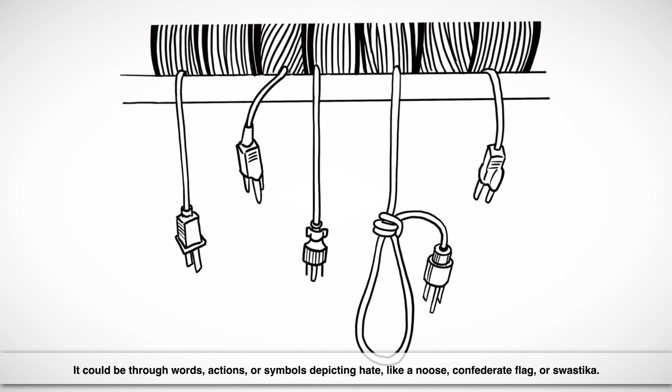In the event of an investigation, we will cooperate. Additionally, further action may be taken contractually. Bias and hate can come across in many ways. It could be through words, actions, or symbols depicting hate, like a noose, Confederate flag, or swastika. Other examples include the issuance of derogatory leaflets, threats, acts of violence, name-calling, offensive jokes, hand signs, improper stickers, unsanctioned non-work-related posters, etc. We expressly prohibit harassment or bias in any form or manner.

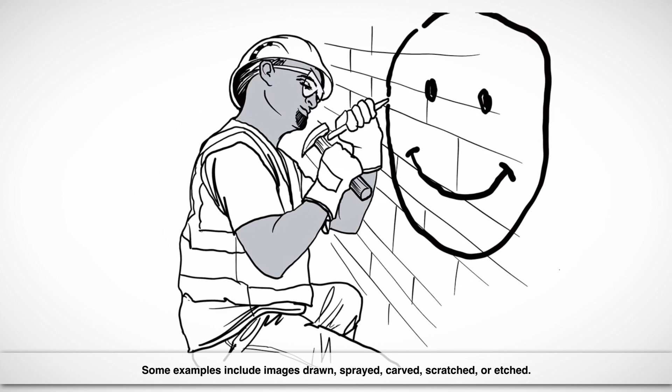All graffiti is defacement of property and vandalism. There will be swift action if an incident occurs. Some examples include images drawn, sprayed, carved, scratched, or etched. Remember, as we have stated before, in certain cases, bias-motivated events rise to the level of a hate crime or a criminal offense. In the event of an investigation, we will cooperate. Additionally, further action may be taken contractually.

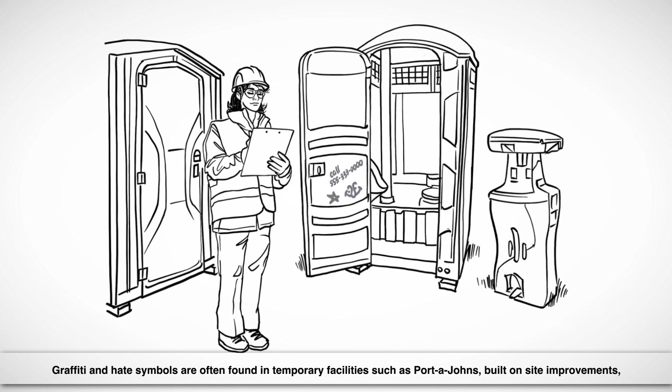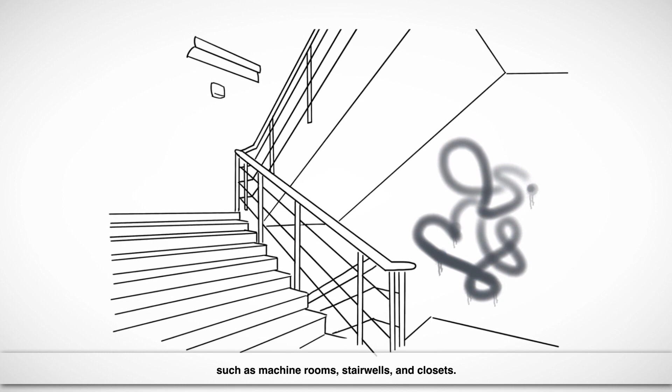Graffiti and hate symbols are often found in temporary facilities such as porta-johns, built on-site improvements, pedestrian-covered walkways, scaffolds, storage trailers, job trailers, site fences, etc. Graffiti and hate symbols are also often found in less frequently traveled locations such as machine rooms, stairwells, and closets. Other locations of graffiti and hate symbols include hard hats, toolboxes, and items on motor vehicles, such as bumper stickers, vanity plates, and license plate frames.

This is our work environment, and as a collective work group, we want to keep it clean, respectful, and inclusive. Remember, no graffiti of any kind is allowed on our job sites.

To help create and maintain an inclusive and respectful environment, we expect everyone to follow these principles on our job sites. Demonstrate a zero tolerance for bias and hate. Care for and support individuals and groups that are different than you.

Speak up if you witness graffiti or a bias-motivated event. Continue to educate yourself and encourage others to do so also. We will maintain transparency in reporting and cooperate with investigations and discussions.

If you are witnessing an event as it is occurring, please consider one of the 5 Ds of bystander intervention. Direct. Assess your safety first. Speak up about the harassment. Remain calm, yet be confident and assertive. Delegate. Locate another person to intervene.

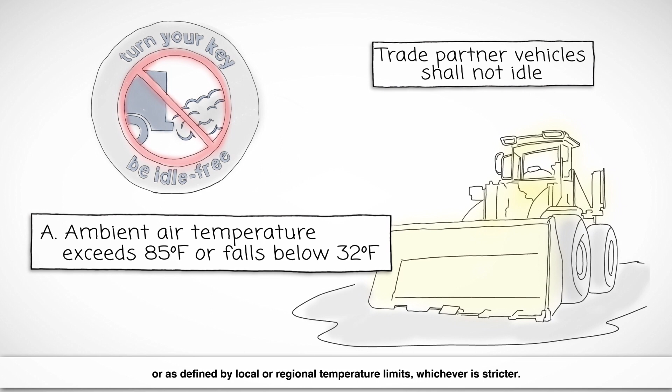The only allowable exceptions to the standard are as follows. A. Ambient air temperature exceeds 85 degrees Fahrenheit or falls below 32 degrees Fahrenheit, or as defined by local or regional temperature limits, whichever is stricter. B. Engine idling is required for the function of auxiliary equipment, i.e. cranes, concrete pumps, etc.

A fluent interpreter must be provided and on site for any crew that has one or more non-English speaking workers. Results of a drug test per the Drug-Free Workplace program are required to attend orientation. Additional testing may also be required if there is an incident, cause, or suspicion. If you test positive or refuse to test, you will not be allowed on site.

All construction offices and projects are tobacco-free. This includes e-cigs, vaping, and all forms of tobacco. A tobacco zone may be established outside the project. If you are issued a badge, keep it on your person at all times when on site.

All workers are expected to participate in the morning safety huddle and stretch and flex to develop a safe plan of work for the shift. Throughout the work shift, if any new tasks or changes come up that weren't planned at the beginning of the shift, work must pause and the plan must be revised. All personnel are empowered and encouraged to stop unsafe acts and identify, correct, and report any unsafe conditions.

Headphones, earpods, or radios of any kind are prohibited, as use of these devices can impair your ability to hear emergency signals or warnings. Do not walk or drive while talking on the phone or walkie-talkie.

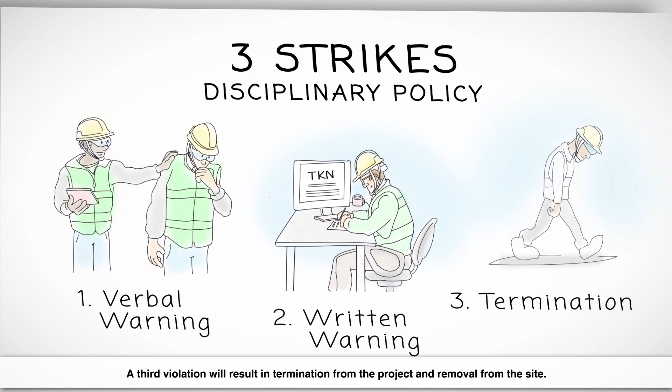There is a 3 strikes disciplinary policy regarding safety violations. The first is a verbal warning. The second is a written warning with mandatory retraining and reorientation. A third violation will result in termination from the project and removal from the site. Our overall goal is to provide safety coaching and retraining when appropriate.

We reserve the right to have removed any employee of any company for serious, repeat, willful, or egregious violations, skipping the 3-strike process listed above. Outside third-party training relative to the safety infraction for any employee to be able to return to the site may also be required. Supervisors and crew leads may also be held accountable for the actions of their employees.

Any injury, illness, or near misses should be reported immediately to your foreman, supervisor, or crew lead, who will notify the site management team after stabilizing any injuries or unsafe conditions. All incidents are investigated for the purpose of identifying the cause and preventing future incidents.

No incident, injury, or any level of harm is ever acceptable. Accidents are usually the result of poor or no planning. Participating in safety huddles, committees, and other safety-related events is something we should all do willingly. By identifying the potential risk your team could encounter and helping to plan the work and working the plan, you are helping to create a safe work environment for yourself and everyone around you.

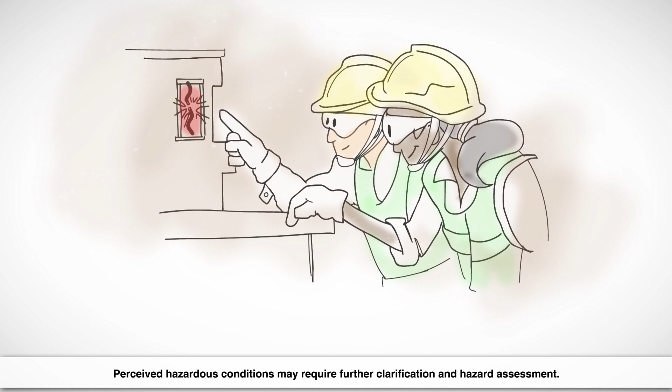Everyone is encouraged to ask questions and report actual and perceived hazardous conditions to site supervision. Perceived hazardous conditions may require further clarification and hazard assessment. If you have any questions or concerns, please ask site supervision for assistance.

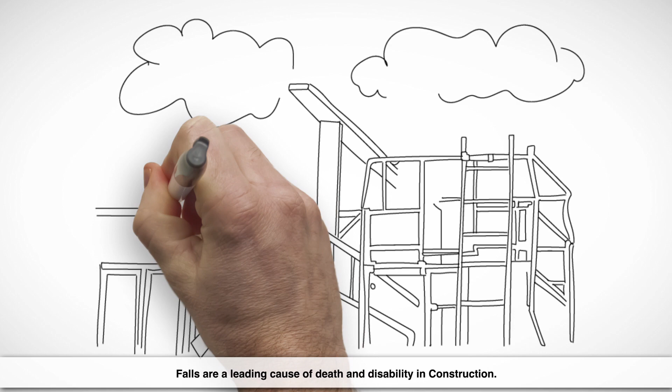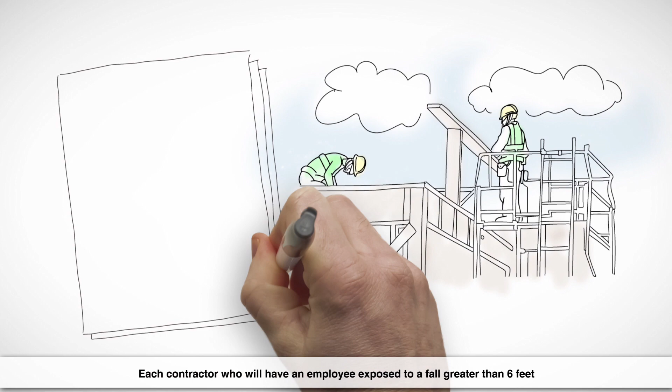Falls are a leading cause of death and disability in construction. Pre-planning is required to identify any risks and provide proper fall prevention for anyone working 6 feet or higher. Each contractor who will have an employee exposed to a fall greater than 6 feet must submit a written fall prevention plan prior to beginning work.

Each employee must be trained in the use of fall prevention equipment and participate in the safety pre-planning process. All conditions that will require personal fall protection shall be discussed and documented in the daily pre-task plan and reviewed in the field by the crew leader.

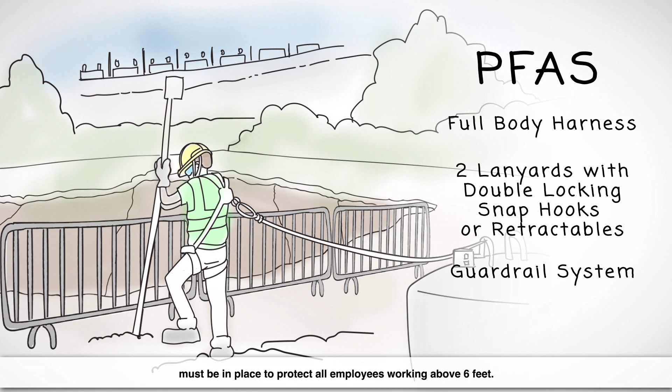A personal fall arrest system, PFAS, comprised of a full body harness, 2 lanyards with double locking snap hooks or retractables, or a guardrail system must be in place to protect all employees working above 6 feet. Safety monitors are never allowed as a means of fall prevention.

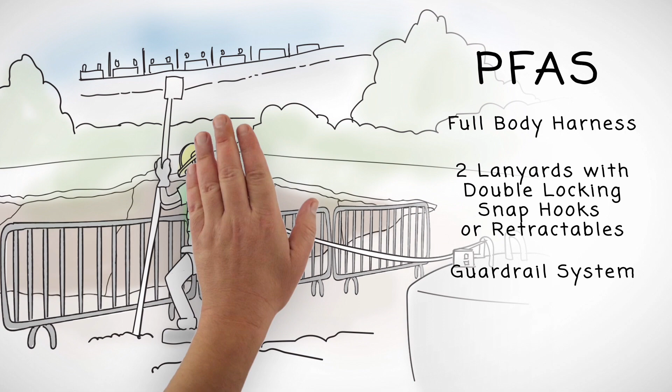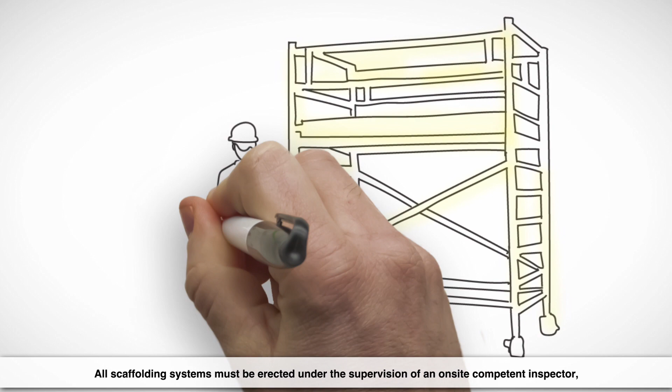All scaffolding systems must be erected under the supervision of an on-site competent inspector using 100% fall prevention during erection and dismantling. Scaffolding must be inspected daily prior to use by an inspector who will tag and date the scaffolding as compliant and safe, or red tag it as non-compliant or out of service.

Never use a scaffold that is out of service. Do not use cross-bracing as a ladder. Cross-bracing cannot be used as an alternative to top or mid-rails.

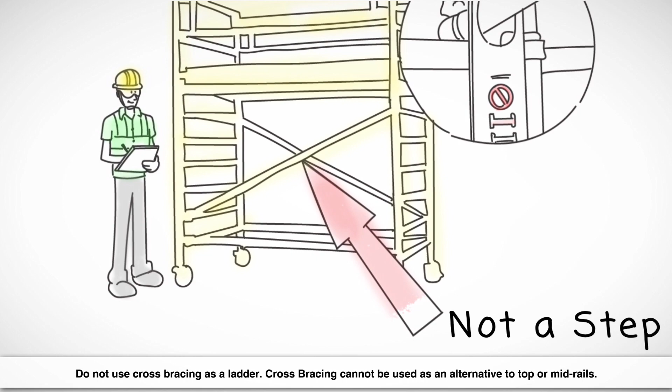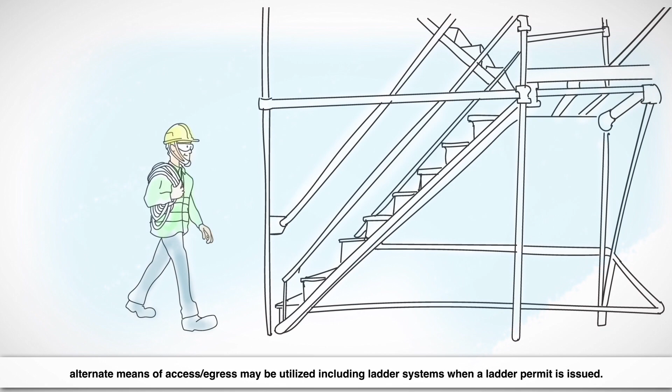Frame and system-type scaffolds, including but not limited to masonry and tube and coupler, must be accessed via scaffold stair attachments. Where space does not permit the use of a stair, alternate means of access/egress may be utilized, including ladder systems when a ladder permit is issued.

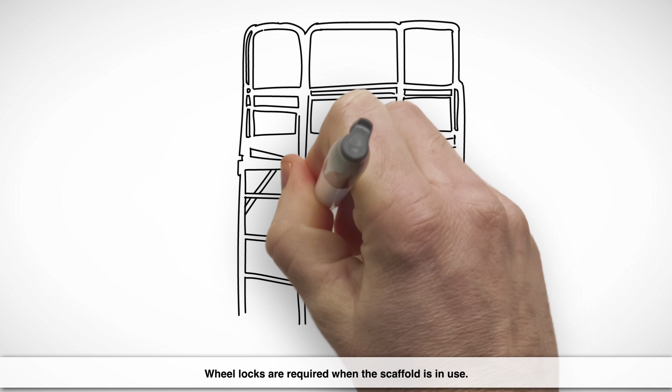Mobile scaffolds can only be used by trained, authorized operators. Guardrails are required on mobile scaffolds when the work platform is 4 feet or higher. Wheel locks are required when the scaffold is in use.

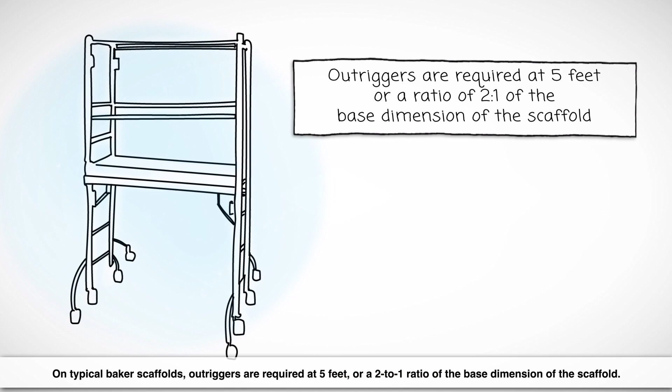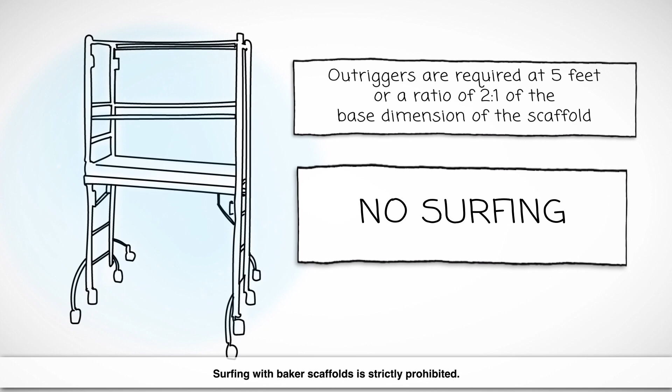On typical Baker scaffolds, outriggers are required at 5 feet or a 2-to-1 ratio of the base dimension of the scaffold. Be sure to evaluate the overturn potential when accessing Baker scaffolds and discuss the need for outriggers again when going above 5 feet. Surfing with Baker scaffolds is strictly prohibited. Any job-specific scaffolding requirements will be reviewed during safety huddles and job briefings.

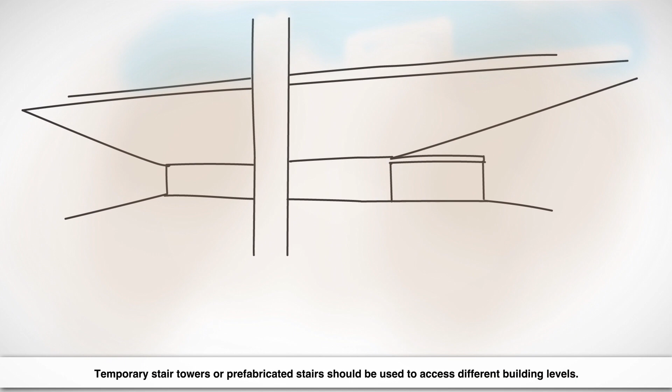The ladder policy states that ladders should be allowed only if other options are not feasible. Lifts and scaffolding are always the preferred method whenever possible. Temporary stair towers or prefabricated stairs should be used to access different building levels. If it is determined that a ladder is the only means of performing a job, a ladder permit must be submitted prior to starting work.

A ladder cannot be on site without a current permit and safety checklist. Permitted ladders must be inspected daily at the start of each shift by a qualified person. Metal, wood, or job-built ladders cannot be used and must be removed from the job site. When working at a height greater than 4 feet, or when 3 points of contact cannot be maintained, 100% fall prevention is required.

Never use a ladder when it's folded. Never stand on the top 2 steps of a standard A-frame ladder. And never store material or tools on a ladder. Any job-specific ladder requirements will be covered during safety huddles and job briefings.

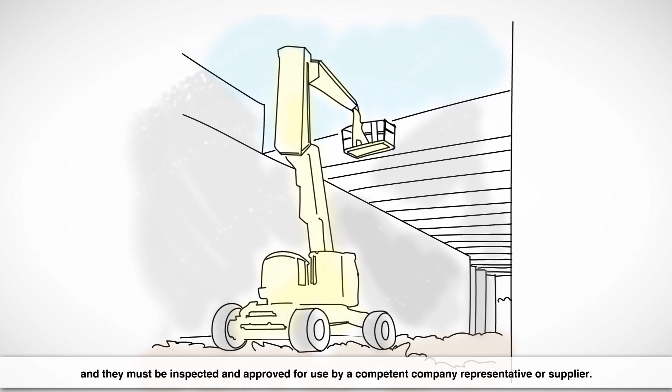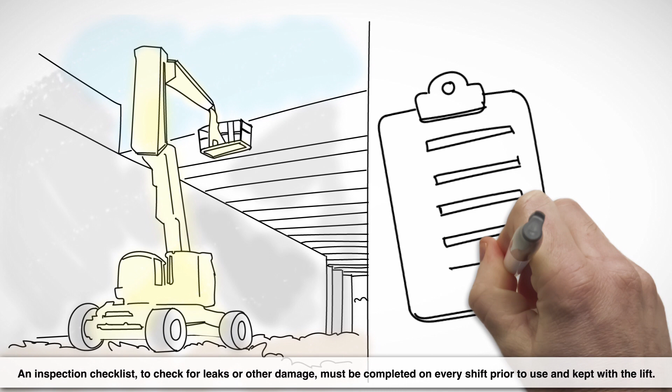Only trained certified operators may use mobile elevated work platforms, and they must be inspected and approved for use by a competent company representative or supplier. An inspection checklist to check for leaks or other damage must be completed on every shift prior to use and kept with the lift.

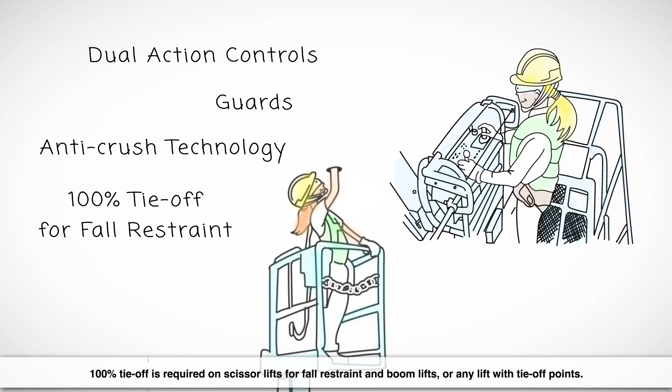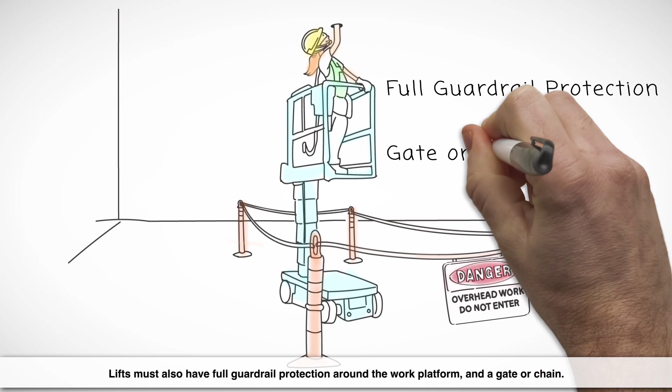All lifts must have dual-action controls, guards, and anti-crush technology. 100% tie-off is required on scissor lifts for fall restraint and boom lifts or any lift with tie-off points. Lifts must also have full guardrail protection around the work platform and a gate or chain. Never stand on the rails or the toe board, and always use a spotter when moving a scissor lift in the elevated position.

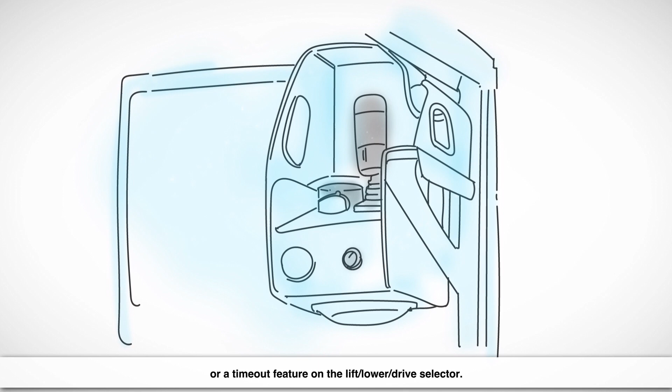All scissor lifts and boom lifts must have an approved shroud or guard over the joystick, or a timeout feature on the lift lower drive selector. This disables those functions after several seconds of inactivity. If your lift platforms are missing these attachments, do not use the lift.

Anyone operating equipment must be properly trained and certified. You will be briefed on the designated equipment and pedestrian travel routes on site. A documented equipment inspection is required for each piece of equipment on every shift prior to use. The manufacturer's operating instructions must be followed for all equipment and tools used on this project.

Seatbelt use is mandatory for all drivers and occupants, and you must obey all site speed limits. Functioning backup alarms and horns are required on all heavy equipment, and a spotter must be used when backing up any vehicle or equipment. The use of cell phones is prohibited while the machine or vehicle is in motion. When on foot or driving other equipment into an area, do not enter until you have made eye contact and get an OK from the operator.

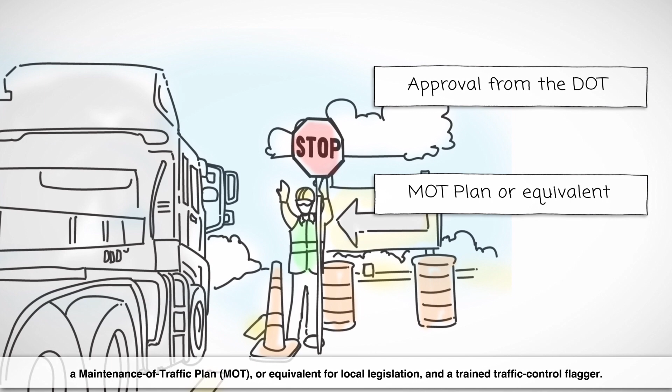Loading and unloading on public roadways requires approval from the DOT, a Maintenance of Traffic Plan (MOT) or equivalent for local legislation, and a trained traffic control flagger.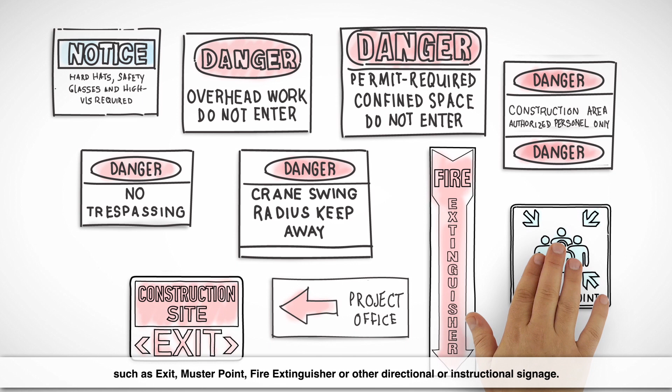Signs and barricades are temporary control measures for blocking off hazardous or restricted work areas. They should be removed as soon as the activity is completed or the hazardous situation has been corrected. When setting up signs and barricades, do not relocate, destroy, or reposition any wayfinding signs such as exit, muster point, fire extinguisher, or other directional or instructional signage.

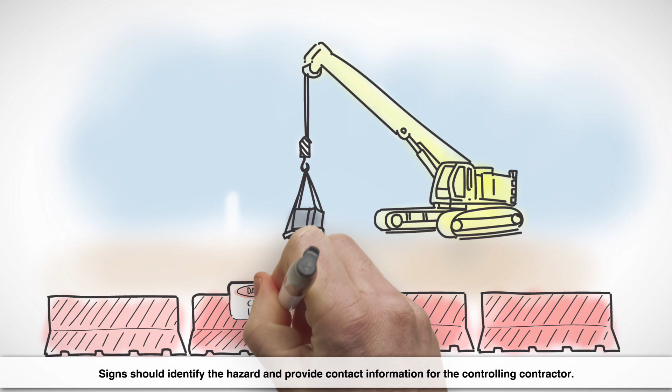Barricades are designed to prevent people from entering an area from any direction, using yellow caution tape for caution or red danger tape to warn against hazardous or dangerous conditions. Hard barricades and signage are required for swing radius and exclusion zones. Signs should identify the hazard and provide contact information for the controlling contractor. Only authorized personnel performing the actual work are allowed inside the barricade tape unless you have prior permission to enter the area.

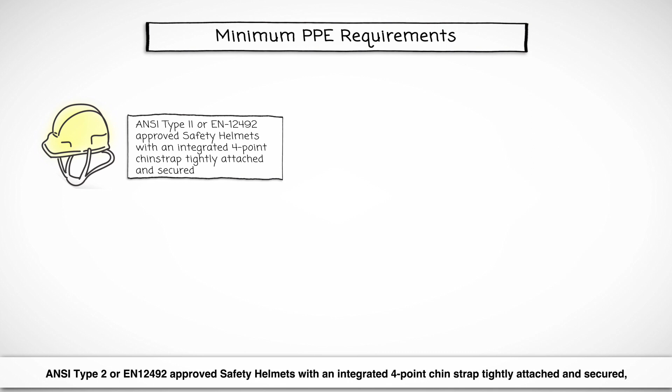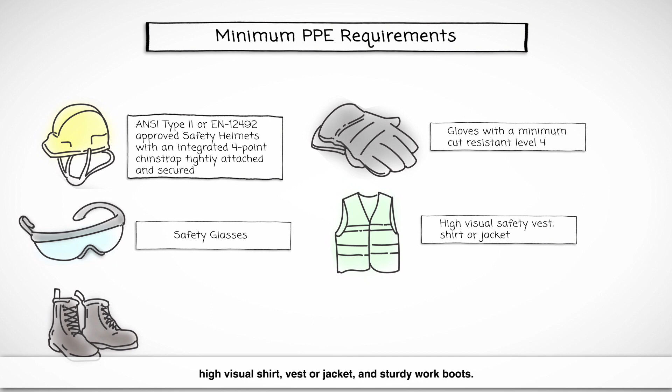Minimum PPE requirements include ANSI Type 2 or EN 12492 approved safety helmets with an integrated 4-point chin strap tightly attached and secured, safety-rated glasses with side shields, cut level 4 gloves, high visibility shirt, vest, or jacket, and sturdy work boots. This minimum PPE is to be worn at all times, gate to gate, except when in designated break or meeting areas. Reflective outerwear is required when working near roadways and near heavy equipment.

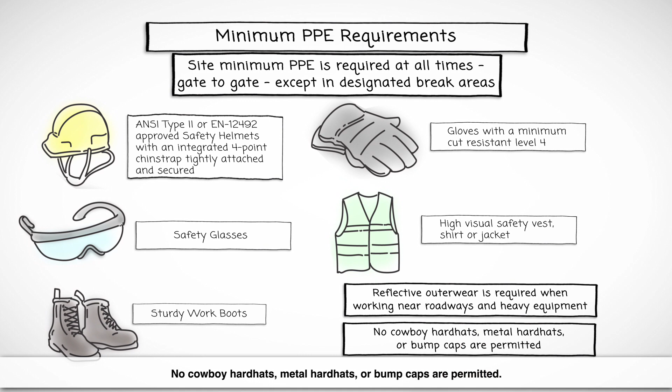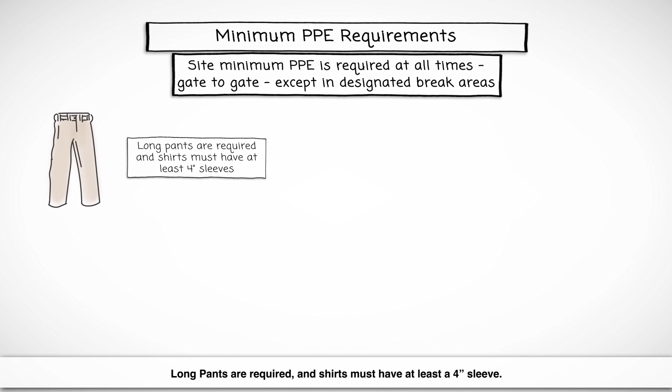No cowboy hard hats, metal hard hats, or bump caps are permitted. Long pants are required and shirts must have at least a 4-inch sleeve. Safety-toed boots are mandatory for masons, drillers, pile drivers, steel erectors, and riggers. Task-specific PPE such as dust masks, respirators, and hearing protection may also be required.

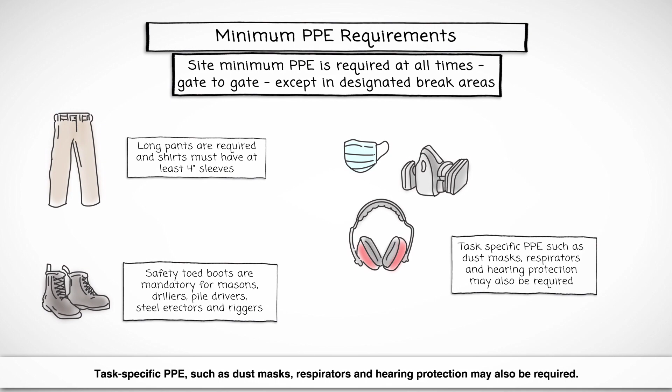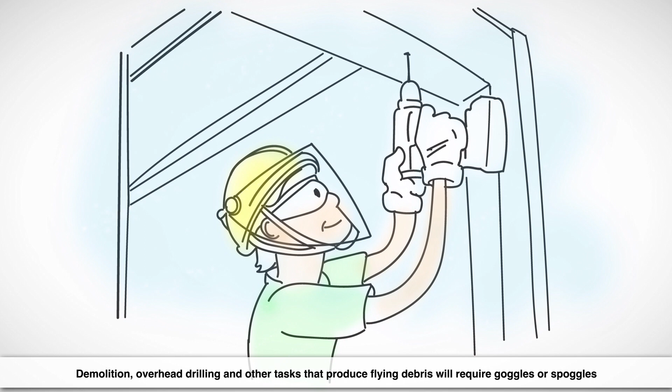Appropriate arm protection such as Kevlar or Dyneema sleeves are required during operations where the arms are exposed to cut hazards. Examples of these activities are working around metal studs and pull boxes, tight spaces between wall studs or above the ceiling, and all demo activities. Tasks above shoulder will require goggles or spoggles. Demolition, overhead drilling, and other tasks that produce flying debris will require goggles or spoggles and a hard hat integrated polycarbonate face shield.

Hand and power tool misuse is a leading cause of injuries, including severe lacerations. Safe tool use requires proper setup, stable work surfaces, and safe working conditions. Always use the right tool for the right job, and take time to properly set up your work area. Setup is key, and having benches or tripod stands to secure the work is a must to allow proper execution with band and circular saws.

Power tools require proper training and proper PPE. They must be inspected prior to use to assure that all guards, handles, and safeties are working properly. Hand tools should be inspected before each use and must be properly maintained and stored. Cut away from your body and keep hands and arms out of the direction of the cut.

Tether your tools while working near the perimeter of the building, leading edges, shafts, and other situations where tools could be accidentally dropped. Tools that create dust will require HEPA vacuums, water spray, or other methods of capturing and containing dust. Cordless power tools are recommended to reduce cord management and trip hazards on site.

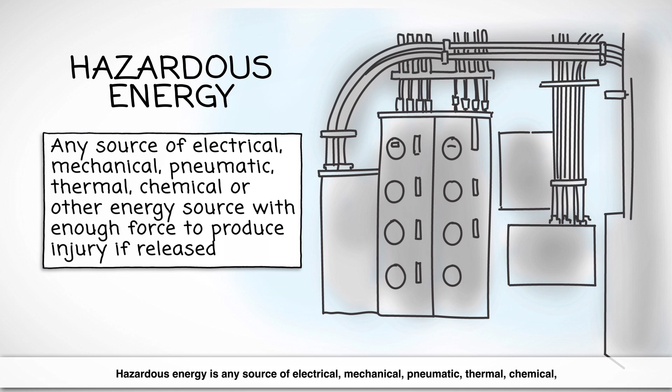Hazardous energy is any source of electrical, mechanical, pneumatic, thermal, chemical, or other energy source with enough force to produce injury if released. Electrical work shall only be conducted on de-energized systems that have been locked out and tagged. Non-electrical work on energized systems requires the stored energy to be dissipated or restrained. A meeting with your lockout/tagout administrator to review the proper lockout/tagout procedures must take place prior to any activity involving hazardous energy sources. All electrical work shall be in accordance with the National Electric Code, ANSI, and regulatory standards.

Inspect all cords and welding leads daily. Damaged electrical cords must be removed from service immediately. 100% GFCI protection is also required. All panels, boxes, switches, and receptacles containing live wires must have a hard cover. Electrical room doors and panels must also be secured or locked at all times. Never work on live electrical panels or parts without prior approval.

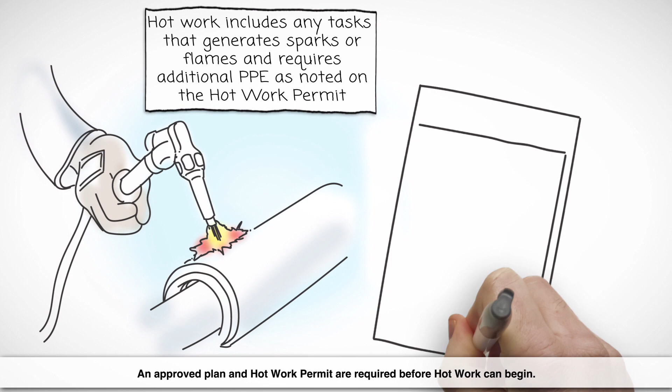Hot work includes any tasks that generate sparks or flames and requires additional PPE as noted on the hot work permit. An approved plan and hot work permit are required before hot work can begin. Hot work permits are limited to the time, date, task, and area specified on the permit, and the approved permit must be posted in the hot work area. All areas adjacent to and below a hot work area must be checked for any combustible materials, openings, or other trade activity prior to starting.

A minimum 20-pound ABC dry chemical fire extinguisher is required for a hot work area, and flashback arresters must be located on the torch head and cylinders. A fire watch must be posted anywhere sparks could fall and must remain in the hot work area at least 30 minutes after any hot work activity has ended.

We want everyone to understand the importance of keeping the job site organized, productive, safe, and professionally maintained. Clean as you go to help eliminate slips, trips, and falls. Neatly store unused materials and dispose of scrap or waste immediately.

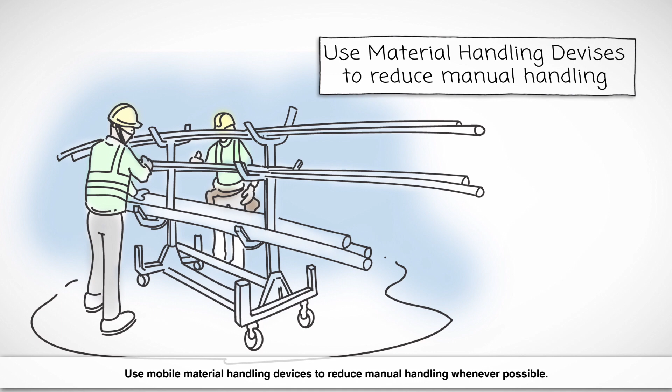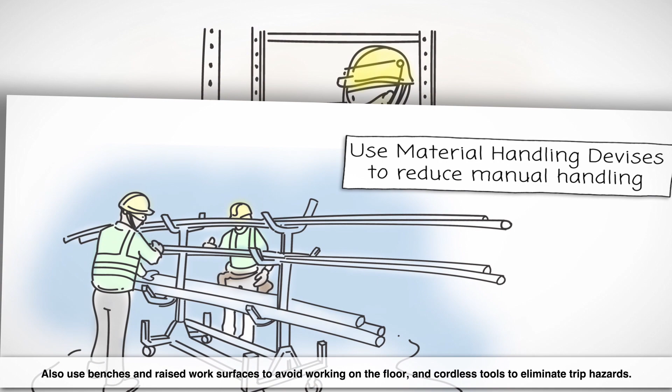Use mobile material handling devices to reduce manual handling whenever possible. This will cut down on soft tissue injuries and cumulative trauma disorders such as back injuries and muscle spasms. Also, use benches and raised work surfaces to avoid working on the floor, and cordless tools to eliminate trip hazards.

When corded tools are necessary, cords must be elevated using a non-conductive device to prevent damage and trip hazards. Cords should be suspended a minimum 8 feet from the work surface in hallways, corridors, stairways, and exit areas.

Cranes can only be operated by licensed designated persons who must submit operator certification NCCCO or NCCER. Some state and local licensing requirements may exceed NCCCO or NCCER requirements and must be followed. You must also be properly trained, certified, and authorized to signal a crane. Each rigger and signal person must be qualified and provide proof of training.

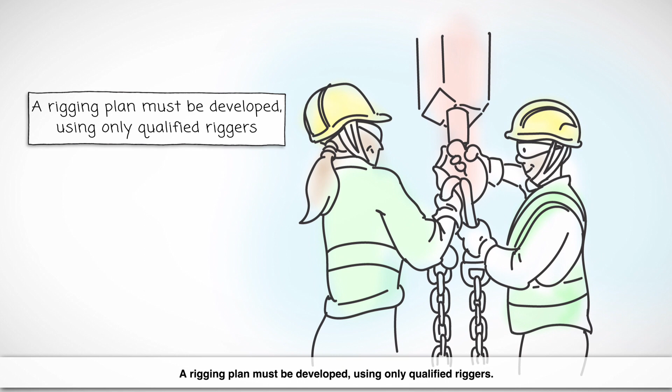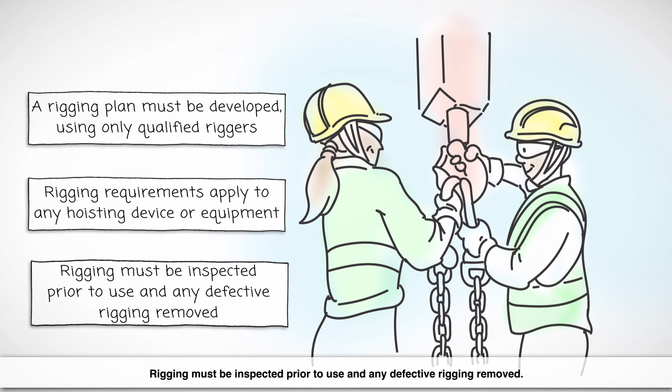A rigging plan must be developed using only qualified riggers. In addition to cranes, rigging requirements also apply to any hoisting device or equipment. Rigging must be inspected prior to use and any defective rigging removed. Each crane requires a lift plan and pre-lift meeting.

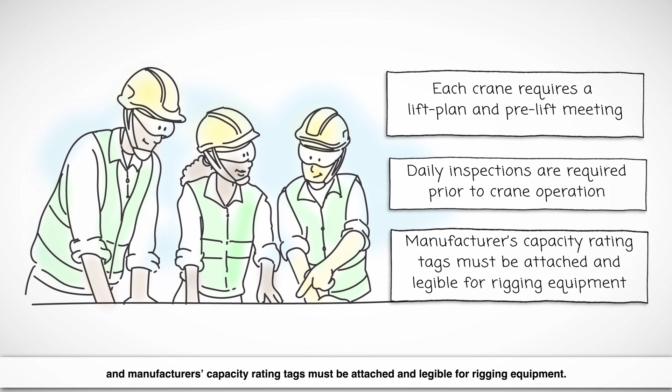Documented daily crane inspections are required prior to crane operation, and manufacturer's capacity rating tags must be attached and legible for rigging equipment. Cranes must set up and travel in designated areas only. Any lift that exceeds 75% of the rated capacity or involves two cranes or lifting over an occupied building will be considered critical and requires a critical lift plan.

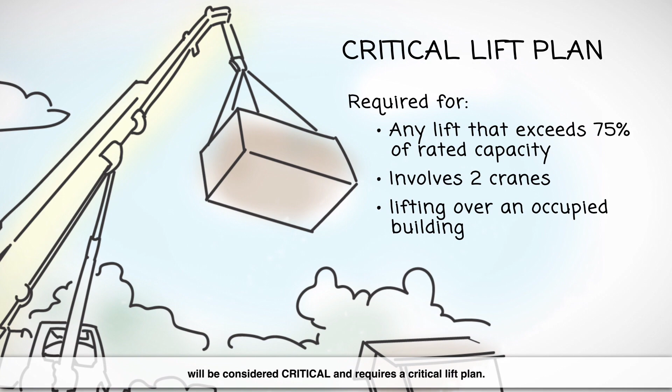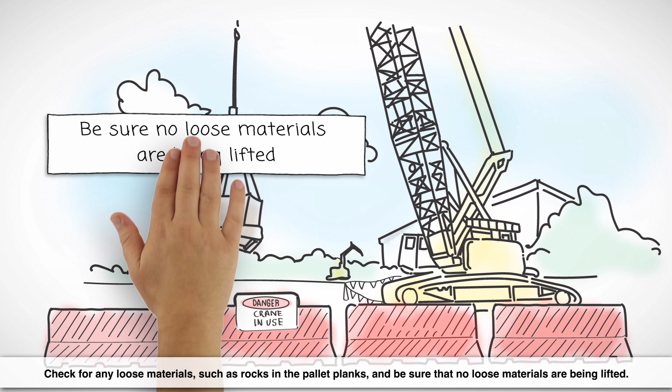Always maintain awareness of overhead loads. Listen for horns or other signals, and never stand or walk under an elevated load. Always be aware of your surroundings and the swing path, which should be flagged off. Check for any loose materials such as rocks in the pallet planks and be sure that no loose materials are being lifted. Other site-specific instructions may be given in the pre-lift meeting.

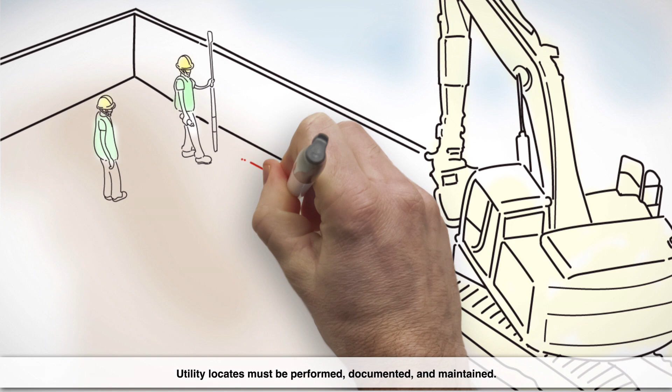A competent person must be identified and be on site during all excavation work and must complete a shift inspection prior to entry by any personnel. Before you dig or drill, you must complete a surface penetration request form and notify your utility locator service. Utility locates must be performed, documented, and maintained.

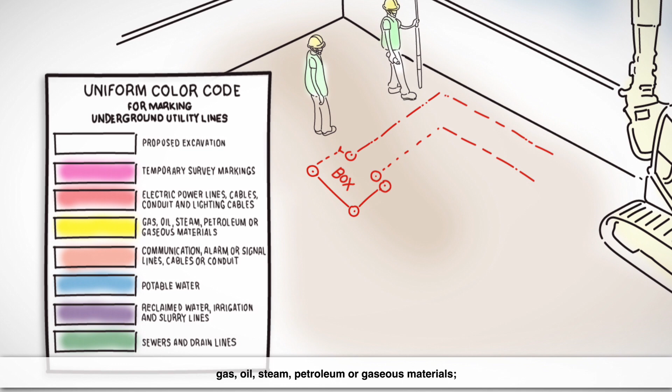Uniform color codes are used to indicate the proposed excavation site, temporary surveys, and the type of digging to be performed, including electric power lines, cables, conduit, and lighting cables; gas, oil, steam, petroleum, or gaseous materials; communication, alarm or signal lines, cables or conduit; potable water or reclaimed water, irrigation, and slurry lines.

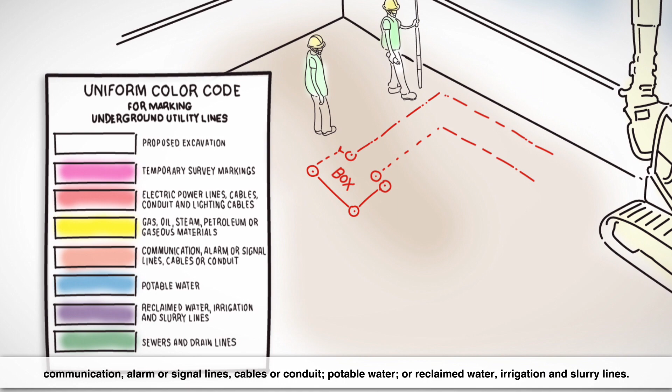Here are some other excavation requirements you must know and follow. Any excavation greater than 4 feet must be sloped, shielded, or benched properly. You cannot bench Type C soil. Access via ramp or stairs must be provided within a maximum distance of 25 feet for trench excavations.

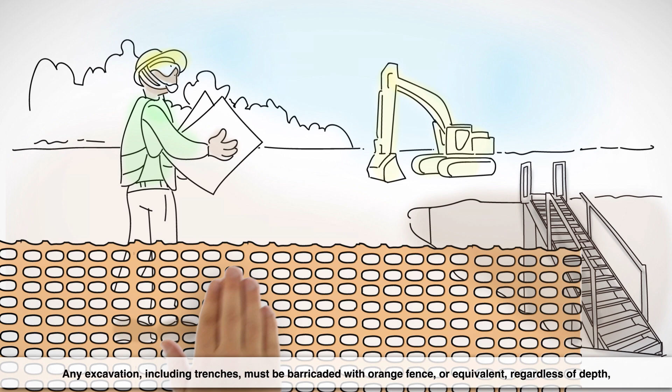Any excavation, including trenches, must be barricaded with orange fence or equivalent regardless of depth and be 6 feet back from the edge. Fall protection is required at the top of excavations greater than 6 feet deep when the slope is less than 45 degrees.

Each worker that may be potentially exposed to hazardous chemicals must be advised of those potential hazards and how to guard against them. You must also verify that you have been properly trained by your employer on hazard communication. The project management reserves the right to approve any chemical brought on site. You must provide a safety data sheet for any chemical you bring onto the project.

Chemical inventory lists and safety data sheets are located in the construction office. This is not limited to liquids and can include powders and solids, such as welding rods and treated wood. Storage areas must also be approved. The site management will also coordinate the sharing of safety data sheets between contractors.

Your supervisor or crew lead will review any site-specific safety data sheets that will be used on your work sites. It is important that your supervisor keep a copy of SDS nearby for material that you are working with on site.

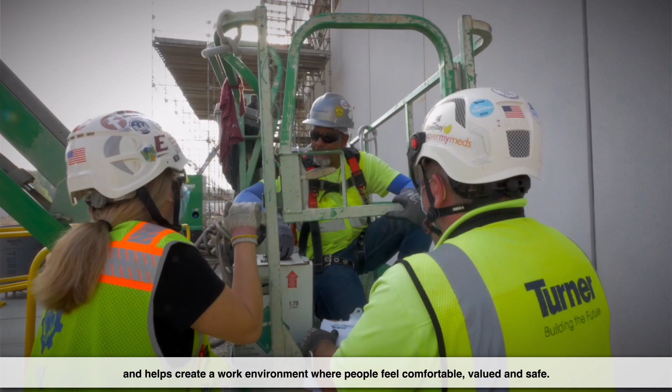Can you remember a time when your attitude towards someone changed in a positive way simply because you took the time to talk with them, listen to them, or walk in their shoes? That kind of empathy enables us to better understand people and develop stronger, more productive relationships. Being genuinely concerned and supportive of others promotes both physical and mental health among coworkers and helps create a work environment where people feel comfortable, valued, and safe.

Empathy is allowing yourself to understand a person's position and what they're going through. Well, one of the ways that I demonstrate it is by learning people's names. People like when you remember their names.

Just getting together with the other crafts and saying, hey, is this going to cause an issue in the future for you? And by practicing empathy with other crafts, this job moves along so much better, so much smoother. And we get a lot more accomplished by having that teamwork. And that teamwork, and what holds everything together, is empathy.

Empathy is the ability to understand the feelings of another person as if you have experienced them yourself. Sympathy or feeling sorry for people is not genuine empathy. Empathy is both knowing and caring about the struggles others may be experiencing.

You can deepen relationships with coworkers by simply listening or asking for their side of the story, sharing your views, and demonstrating a genuine concern for the feelings they have. Also, realize that there are outside influences that affect everyone's life. A person who has a nice breakfast and heads off to work has an entirely different start to their day than a single parent or caregiver who has much more to deal with before their workday begins.

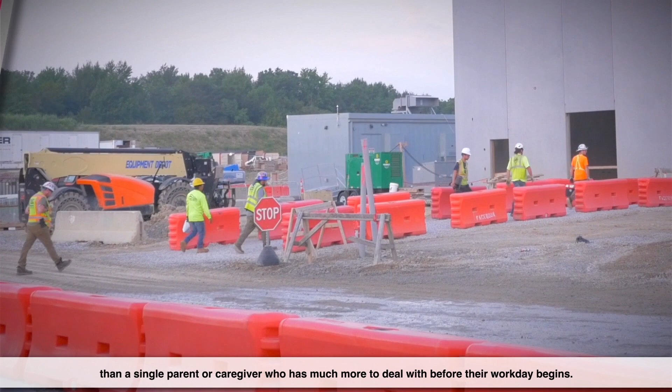It's nice to work in an environment where your preferences or your feelings matter to other people. The goal is to make people feel wanted, needed, safe, cared for, and connected.

Let's consider the benefits of empathy and respect on the job site. It allows us to be ourselves and be accepted for who we are, make mistakes and learn from them, ask questions and challenge ideas, give and receive feedback, take risks, have the full support of the team, and speak up if we see harassment, hazing, or intimidation.

We learn empathy by doing. Try picking one empathetic action that you can practice now. Become more aware of how recent events are affecting others. Jumpstart a connection with others by asking questions, sharing stories, and finding common ground.

Try being more understanding and less judgmental of others. Speak up and intervene if you witness disrespectful behavior towards someone. If you make a mistake, admit it and learn from it. Also, learn from others' mistakes.

I believe when you're genuinely respected, you feel good about who you are, what you believe in. Just respecting other people and their position, their feelings. I would say empathy. If you address workers in a way that disrespects them, you can bet your life that most of the day they're going to be thinking about that.

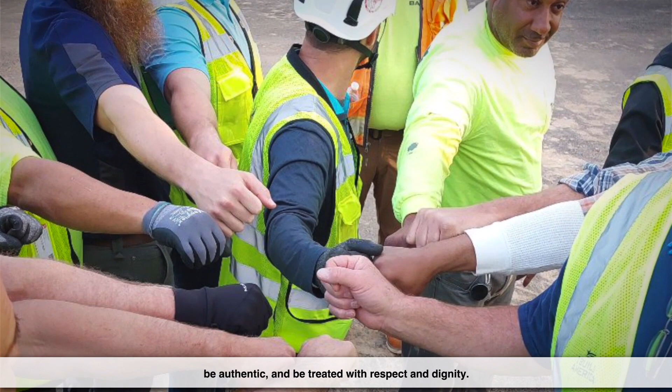Safety should be part of every decision we make and every action we take. We care about your well-being and want you to return home each day injury-free. We must communicate any unsafe working conditions or problems with our coworkers, supervisors, and other trade workers. Daily observation and feedback are essential to a safe working environment.

If you see something that has changed from the pre-task plan, stop and ask. Everyone is authorized to stop work to address any unsafe working condition. We build safe work habits through real-time feedback and by coaching safety. We also use the buddy system to pair up coworkers to help ensure the safety of others as well as our own. All workers are expected to play an active role in creating a safe work environment.

By actively caring for each other, communicating, and coaching safe work habits, we can achieve our goal of an injury-free workplace. Let's be relentless and keep each other accountable by making sure we pre-plan and discuss risk every day, and that we continue to actively care. Thank you for your support and help maintaining a workplace that promotes an injury-free culture. Together, we will continue to improve our performance and make our projects the safest possible.